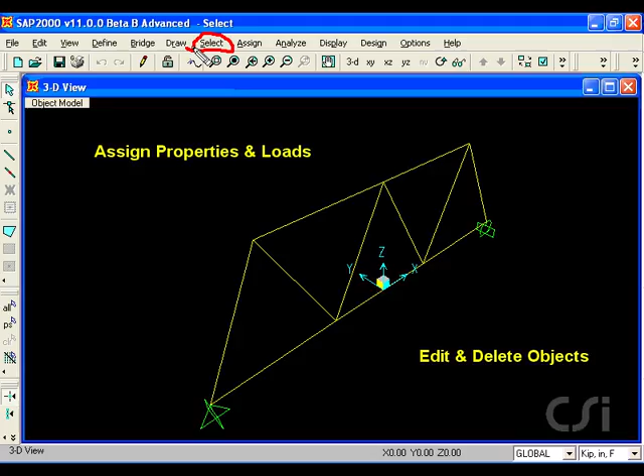This tutorial will illustrate some of the select options available within SAP 2000. Selects are used to assign properties and loads, to edit and delete objects, and to selectively display tabular data.

The first select is the pointer window command, which is also available on the toolbar. It is active when depressed. A single click on an object will select it. This same command can be used to do a window select. Drawing the window from left to right will select all objects that lie completely within the window.

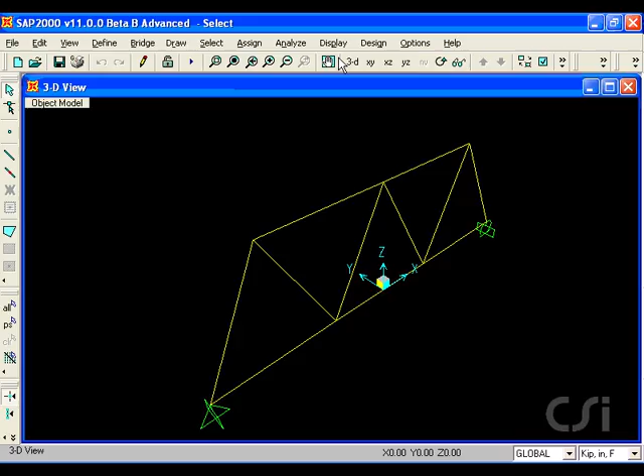If we use this command once more, but this time draw the window from right to left, not only will any object lying within the window be selected, but any object touched will also be selected. Note that selected objects are highlighted with dashed lines.

Next, we will use the polyselect, which is similar to a window select in that any objects which lie within the polygon are selected. Next is the intersecting polyselect, which selects any objects touched by the polygon or which lie within the polygon.

A powerful selection command is the specified coordinate range select. Here we can identify if the objects need be completely within the range to be selected, what types of objects to be selected, and the range in each direction. Here we are asking all joints to be selected.

We will use the same command once more. Again, only selecting point objects, but this time we will set the selection range in the X direction to be between the values of 0 and 300. This selects only the joints on the right half of the truss.

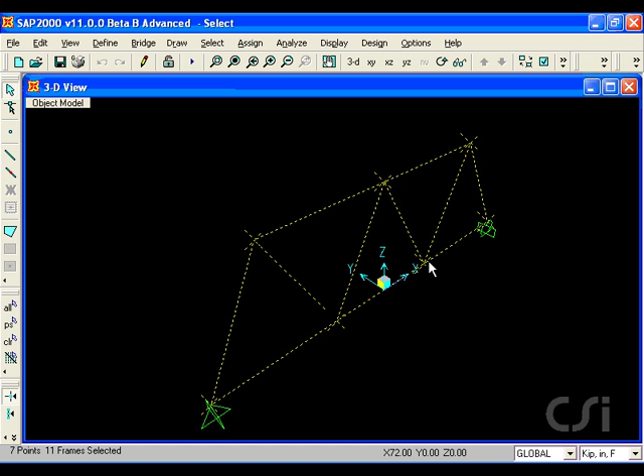All objects lying in a given plane can be selected by using the Click Joint in Plane commands. The Select Lines Parallel To command allows for the selection of all line objects parallel to a given line, axis, or plane.

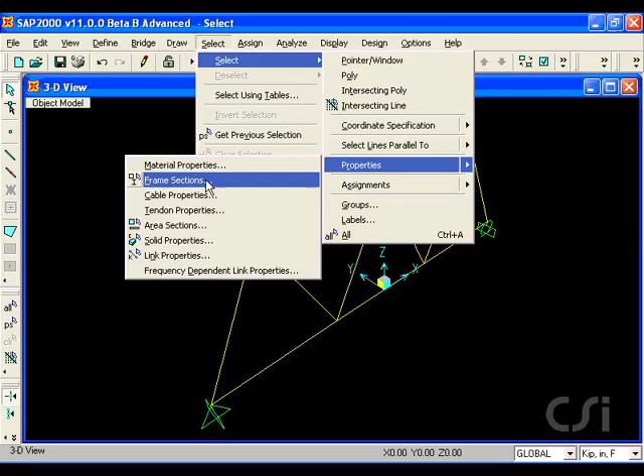The Select Properties command allows for the selection of objects by the properties assigned to them. Here we select by frame sections. We can also select by joint assignments. Here we wish to select all supports that are restrained in the global X direction.

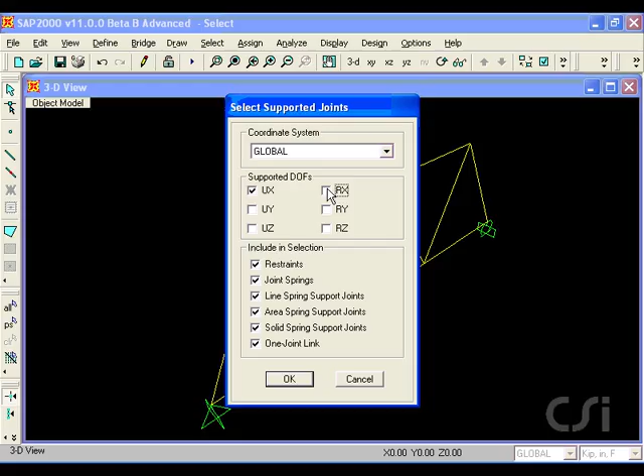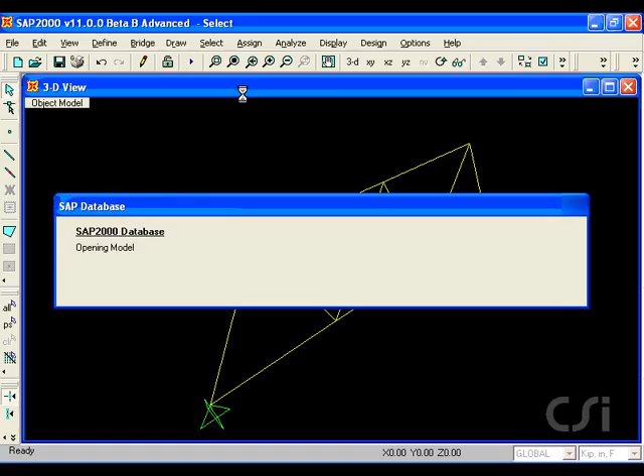Note that the program has selected only the left support, as the right support is free to translate in the X direction. The Select Using Tables command is a powerful option for the non-graphical selection of objects. Here we check the connectivity data box.

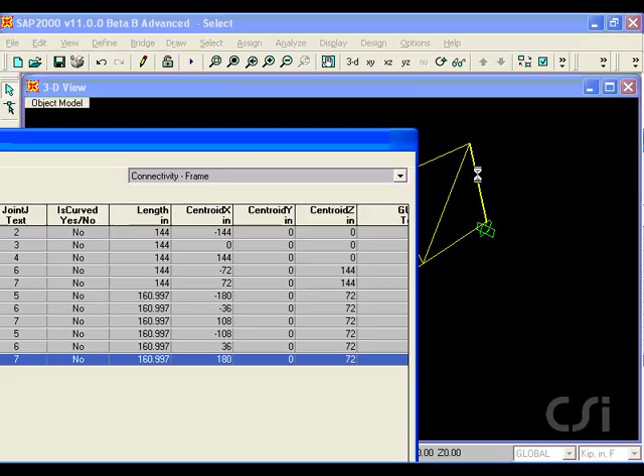Clicking on frame number 11 highlights this object in the model. Next, we will filter the table to include only frame objects whose x-centroid is greater or equal to 0.

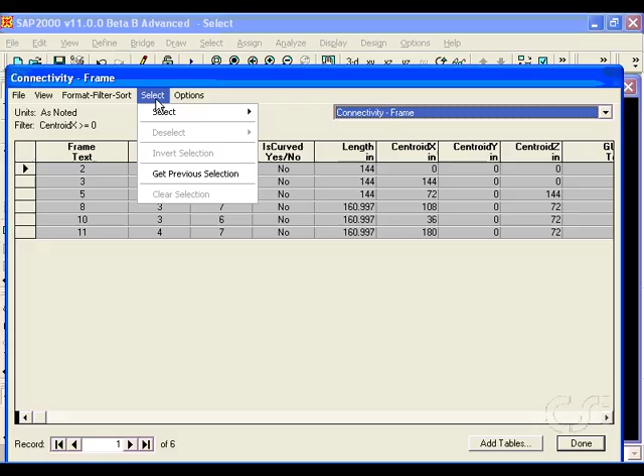Then we use the select command to select all the frame objects in this reduced table. Note that only the frame objects whose centroids are at or to the right of the origin are selected.

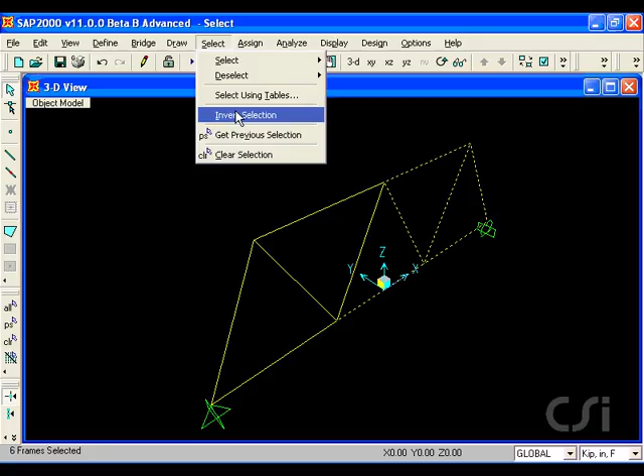A very useful command is the Get Previous Selection command, which also shows up on the toolbar. Clicking this button simply selects the same objects from the previous selection. The Invert Selection command selects all objects not selected at the time the command is invoked.

Last but not least is the Select All command, which selects all objects, and the Clear Selection command, which is useful if you have made a mistake in your selection. This concludes this tutorial.